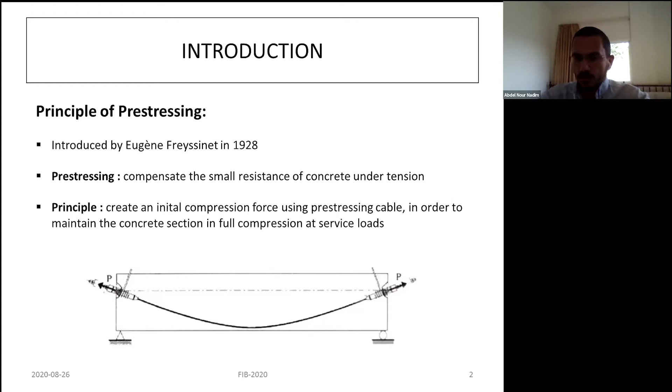It is used to compensate the small resistance of concrete under tension by creating an initial compression force using the prestressing cable. We have two types of prestressing: full prestressing, in which we maintain the concrete in a full compression state under extreme service loads; and partial prestressing, in which we are allowing tension stresses and limiting cracking in the concrete sections.

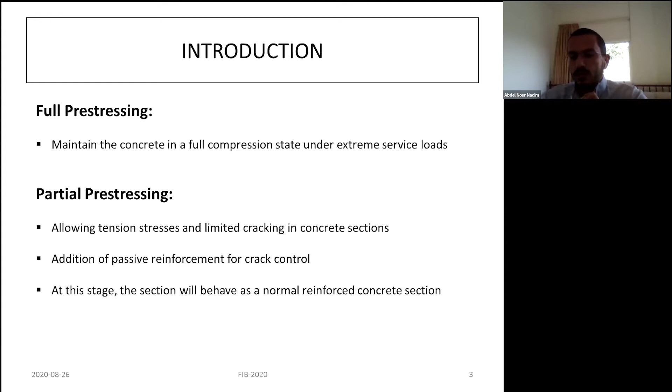The main objectives of this article are: one, develop a new approach for dimensioning of prestressed concrete sections. This new approach is applicable for both full and partial prestressing. It combines all service limit states and ultimate checks. It represents the permissible domain and formulates the formwork condition known in French code as la condition de coffrage.

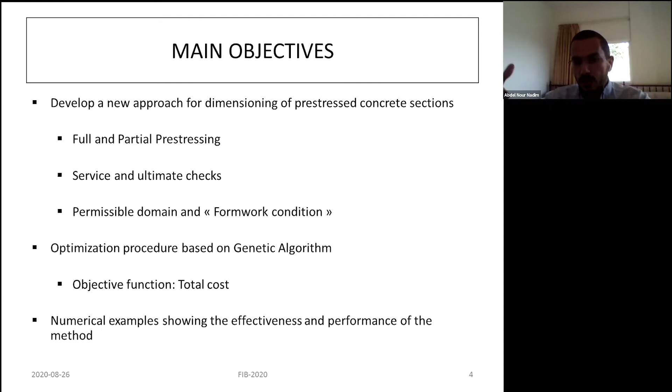In the second part, this new method is implemented in an optimization procedure based on a genetic algorithm with the total cost as an objective function. And at the end, the numerical examples showing the effectiveness and performance of this method will be presented.

Conventional design method. First of all, I would like to start by presenting what is usually done in conventional design method.

Usually, for each service limit state, we start by computing the values of P critical and P over critical, known in French code as la valeur de P sous critique et la valeur de P sur critique, based on stress limitation and cover conditions. And then the higher value of those two P's is considered for the design.

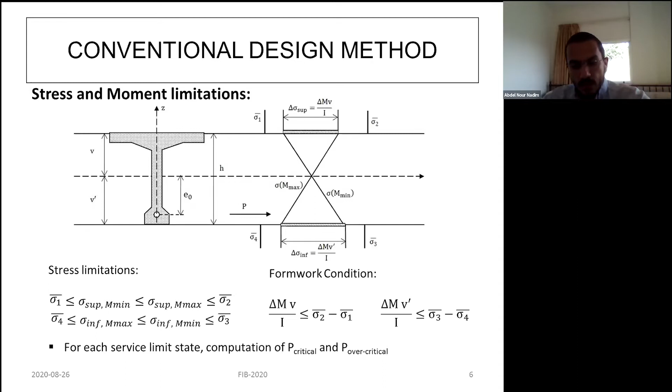As for the formwork condition, known comme la condition de coffrage, it results from the upper and lower stress constraints, based on which the minimum needed concrete section for serviceability checks is deduced.

Now the new pivot method we're presenting. In this method, the prestressing force P is considered as an exterior force acting on our section, and the crack width is replaced by a limitation on the stress in the passive reinforcement based on the provisions of the Eurocode.

And since we're dealing with T sections with heels, the width B of this section varies linearly along the height of the section. Therefore, the mechanical properties can be obtained by successive integration. We profited from this property for the analytical formulation of our new approach.

The main equations of this new approach are obtained from the basic equilibrium equations, which are the axial force and the bending moment, based on which a general polynomial function of the neutral axis position was obtained. This general polynomial equation f of x can be used for both full and partial prestressing.

With the only difference that when it is used in full prestressing, we have a fictitious position of the neutral axis since it will be located outside our section, whereas when it is used in partial prestressing, we have a real position of the neutral axis since it will be located inside our section.

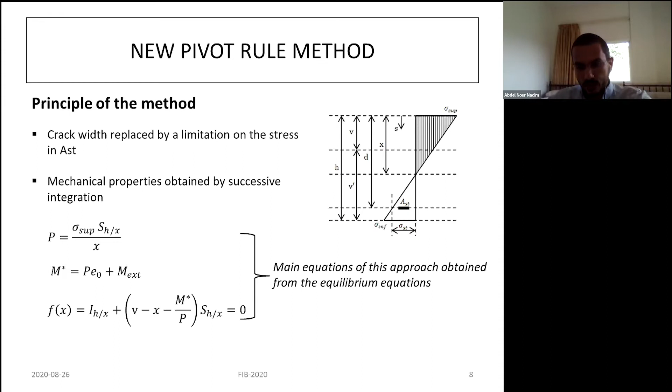Now, this new pivot rule applied for fully prestressed sections. First of all, we start by finding the neutral axis position by solving the main polynomial equation f of x equals 0. The well-known stress expressions on extreme fibers for full prestressed concrete sections are found.

The permissible domain is drawn by expressing the stress limitation in the plane P, M star. This domain is delimited by 4 lines that are parallel to each other 2 by 2, forming a parallelogram.

The following pivot rule representation shows the evolution of the stress diagram by moving along the contour of the permissible domain. For example, when we are moving along line D3, as if we are rotating around pivot 3, the stress sigma 3 is reached. When we reach the intersection of 2 consecutive lines of the contour, 2 stress limitations are reached simultaneously.

In addition, the known values of Pmin and Pmax can be obtained graphically and analytically. Finally, we can see the clear representation for the allowable limits of P inside the permissible domain.

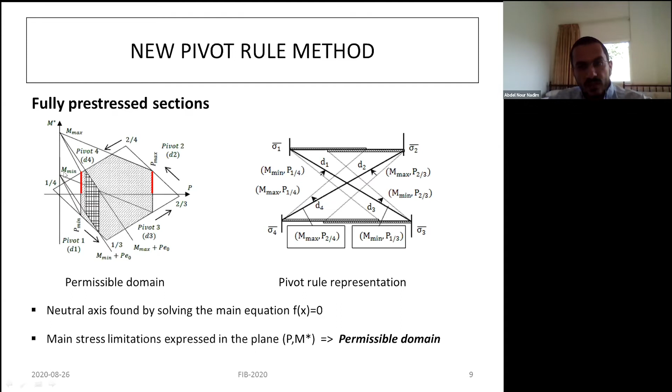Now, if this new pivot rule is applied in partially prestressed concrete sections, the same polynomial equation f of x can also be used to find the values of P critical and P over critical. The same pivot rules apply, with the only difference that the lower stress limitation sigma 4 will be replaced by a stress limitation on the passive reinforcement AST.

For the domain extension, we can see here clearly the domain extension. The extended parts of our domain consist of 2 curves that represent pivot 2b and pivot 4b. The intersection between pivot 2 and pivot 2b is clearly the limit between cracked and uncracked section.

We also have a significant gain in the value of Pmin, since the limit D4 of our permissible domain is replaced by pivot 4b, by the curve pivot 4b that is shifted further up.

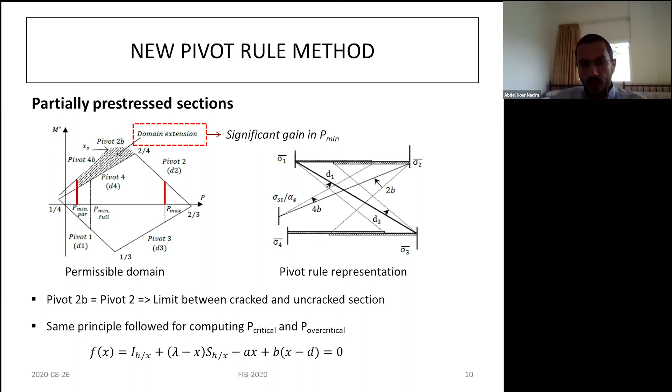Now, for the formwork condition, known as 'la condition de coffrage' in the French norms, this formwork condition is expressed or represented in the plane delta M-P for both full and partially prestressed sections. It is expressed independently from the values of P and E0.

This condition is considered verified if the difference between the maximum and minimum exterior applied moments is less than the maximum delta M value. We can clearly see here the extension of the formwork condition due to the partial prestressing. In addition, we have again the formwork condition verified for values of V over V prime less than 1.

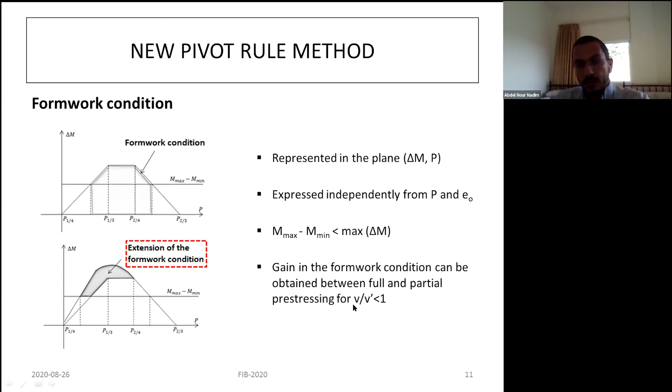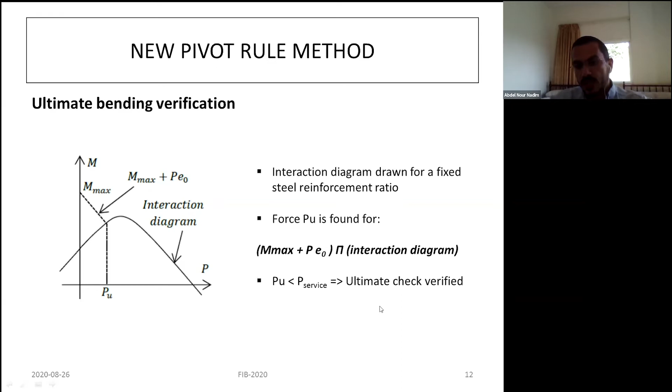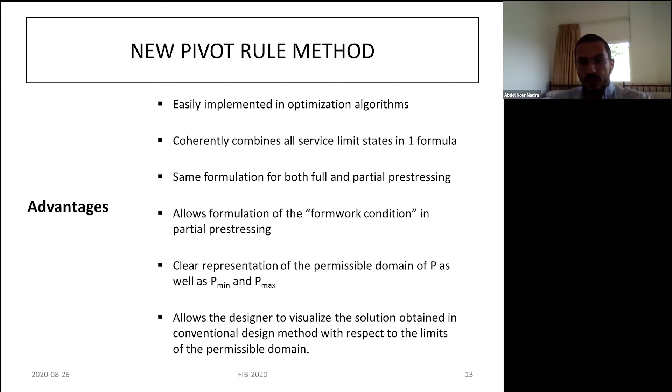We have a clear representation of the permissible domain with the range of permissible values between Pmin and Pmax, and good importance should be accorded to Pmax, since it might control the design in some of the serviceability cases, in some of the service combinations. Finally, it allowed the designer to visualize the solution obtained in conventional design methods with respect to the limits of the permissible domain. Now we move to the optimization part.

An optimization procedure was implemented based on genetic algorithm with a penalized cost objective function with geometrical and flexural constraints. The design variables are the geometrical dimensions of the sections, the percentage of passive reinforcement, and the tendon configuration.

When it comes to the optimization methodology, since we are using a genetic algorithm, the following was followed: first of all, an initial population was generated randomly. For each individual, meaning for each couple V-H generated in this population, the optimal dimensions of the heels were found based on the computed P value.

This was based on the tendon configurations that were introduced automatically in our Scilab program. This calculation is repeated for each individual of the first population. At the end of the first iteration...

All the objective functions are evaluated and the genetic operators are used in order to generate a second population and move to the second iteration. This iteration process shall continue until reaching the stop criteria and the optimal solution is obtained.

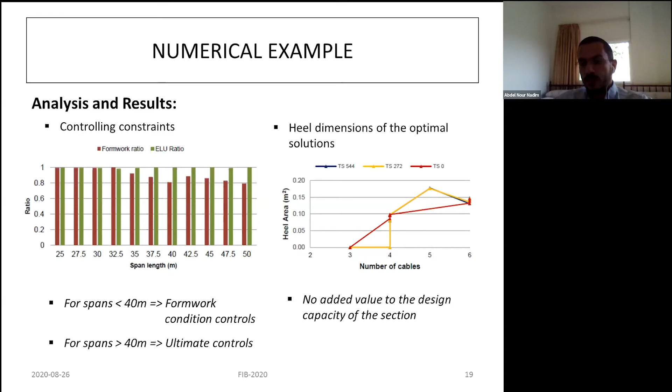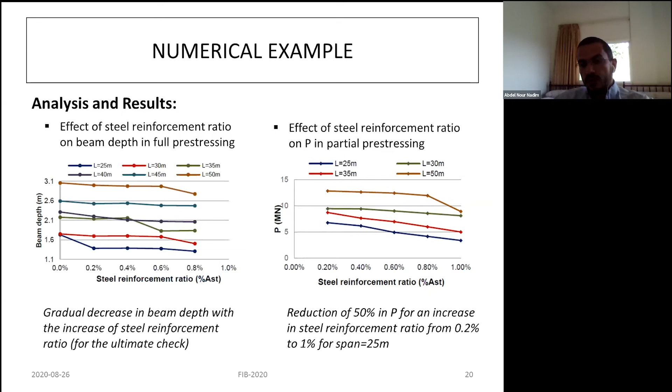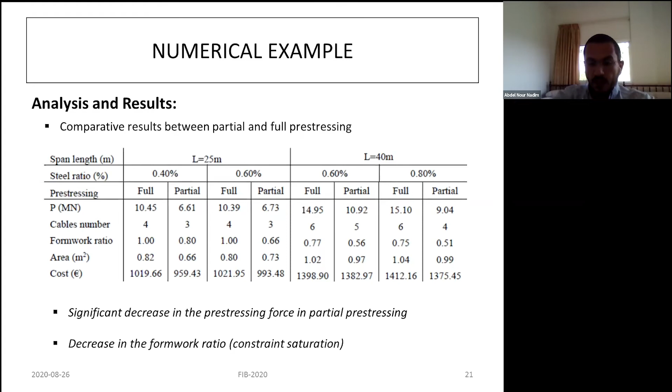And finally, a sensitivity cost analysis was performed, a sensitivity for the cost of the concrete and the active reinforcement was performed. It was clear that the optimum solution is directly affected by the unit cost.

And finally, we can say that this optimization procedure, or the objective function related to this optimization procedure, can be easily modified based on the designer's objective. This means that if the designer chooses to minimize, for example, the prestressing forces, the concrete section, the passive reinforcement, this can be done easily. The objective function can be modified easily as opposed to conventional methods for dimensioning.

That's it. Thank you very much for your attention.

Thank you very much. That was a very, very clear presentation. I understood it, I think, most of it. Thank you.

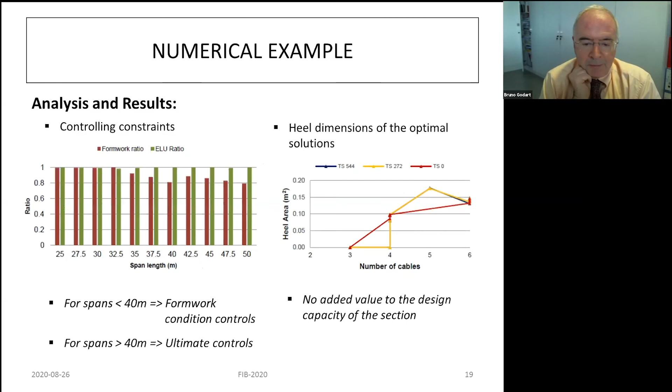Bruno Godart: Yes, I have two questions, maybe. If you show the slide 17... in your optimization with the genetic algorithm, it seems that the ratio of steel reinforcement bars has not been considered as a design variable. Can you explain why?

No, actually, I tried to program my algorithm in a similar way to what designers do in practical life, which means for a certain specific percentage of steel reinforcement, I am running a certain optimization calculation. This means that my calculations will be repeated for several percentages of steel reinforcement. This means that for each percentage of reinforcement, I ensured that the needed rebars had enough place to be placed inside the heel of my section. But the steel reinforcement was not a design variable. It was something that was specified at the beginning of each iteration.

Okay, but it could be considered also as a variable. Yes. I didn't say no. Yes.

Okay, and my second question is about the fatigue limit state. I am talking about the fatigue of steel reinforcement and fatigue of steel prestressing. Have you an idea how to take into account these rules on fatigue in your procedure?

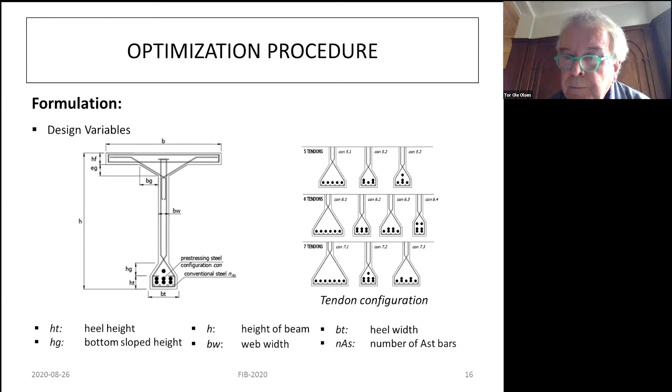I have one question. After reading your paper, I got the impression that this tool of yours is also thought to be used for conceptual design. Yes. Okay. And as such, it's very valuable.

And if you take up your page 22 from your presentation.

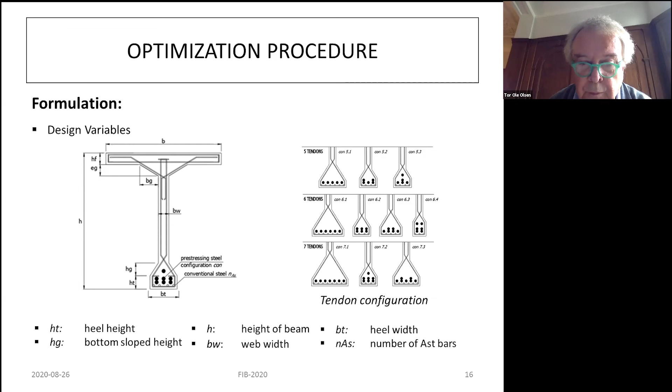So my question is, at the bottom there, you mention the objective function is easily modified. Let's say you're not optimizing on the cost of the beam itself, but something else - for example, if you have limited crane facilities. Could you then just put that into your model and optimize on that?

Yes, actually, if I had a limited crane facility, my concern would be to limit the weight of my beam, if I got you right. If this is the objective, I can easily modify my objective function - it will become the area or total section of my beam. Once my objective function is modified, I can modify my algorithm, so I will be minimizing the weight of my beam.

This means I might need to add extra rebars, extra cables, extra active reinforcement, but in this specific model my purpose is to minimize the weight of my section. That's good, because you end up with a slightly more expensive beam, but maybe a less expensive crane, for example. Exactly, this is the point.

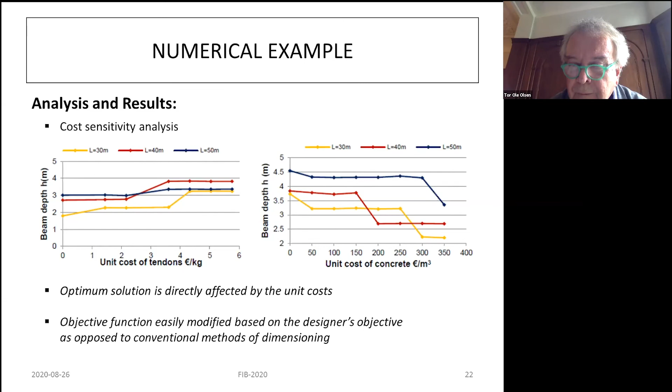Can I just follow up on that? What do you think is the best use for this? Do you see it being useful at a conceptual design stage, or is it more useful for optimizing at a later design stage when you've closed out most of your design decisions?

Actually, I can say it can be used in both cases. Using it at early stages is efficient since we will have an idea of the section we might obtain in the final design, and since the analytical procedure is not formulated in a complicated way, it can be used even at early stages. We don't have complicated calculations that we need to leave for advanced stages of the project, so it can easily be used both at early stages and at final design stages.

Okay, and how long does the optimization take to run? Actually, it's a question of one or two minutes on Scilab - if you know Scilab, it's similar to MATLAB. One or two minutes, not more.

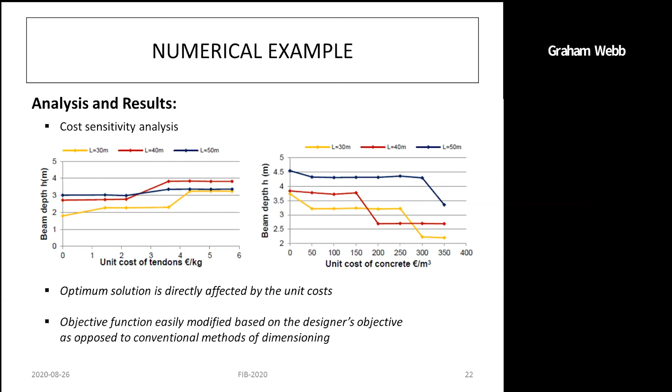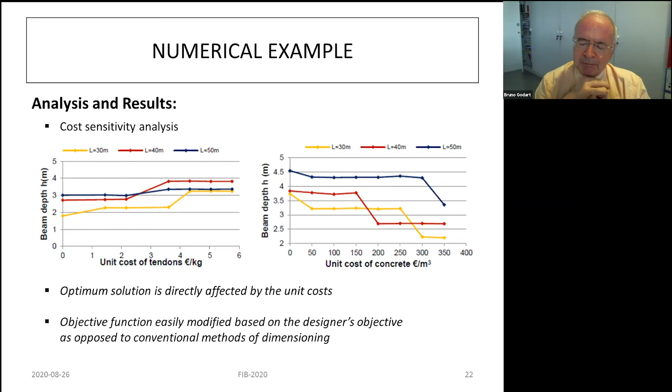I have another question: in which order do you manage the checking of ultimate limit state and service limit state? Actually, if we go to the conventional design method, we start by checking our section at service limit states, then we verify our section for ultimate checks. This is what is usually done. Our optimization procedure is a bit similar to what is usually done in the conventional procedure.

We start by finding the value of the prestressing force that is needed. After that, we choose the heel dimension based on specific tendon configurations introduced in table form in our algorithm. Then we perform the ultimate check verification. But it turned out that in all optimal solutions, the ultimate check verification is controlling the design. This doesn't mean we are performing the ultimate check before the service check - we're following the same steps.

At the first step, we're doing the serviceability checks and finding the force P. Then we're performing the ultimate checks. But it turned out that the ultimate checks are controlling the design, even though they are not performed before the service checks.

And your optimization is working on both aspects? Yes, for sure. Actually, what we did is create what I called a ratio - we have a ratio for the values of P, a ratio for the formwork condition, a ratio for the ultimate verification, a ratio for the shear verification. A ratio that has a value of 1 means the constraint is saturated and controlling the design. So all those verifications and checks are included in the design.

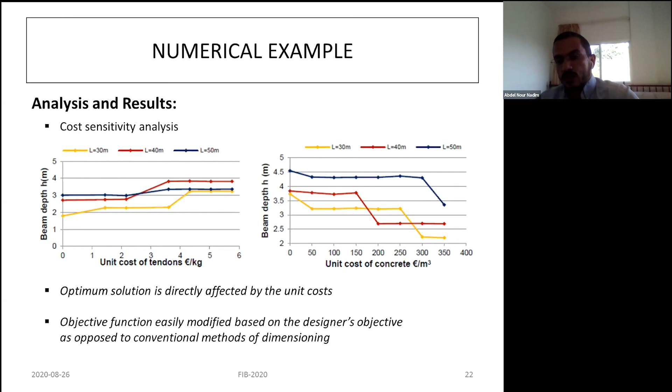Going back in the presentation, in this table, when I mentioned the flexural constraint here in this slide, it includes the minimum prestressing force, the maximum prestressing force, the formwork condition, the ultimate bending check, and the shear verification. All those constraints are taken into consideration in our optimization algorithm, in addition to the geometrical constraints.

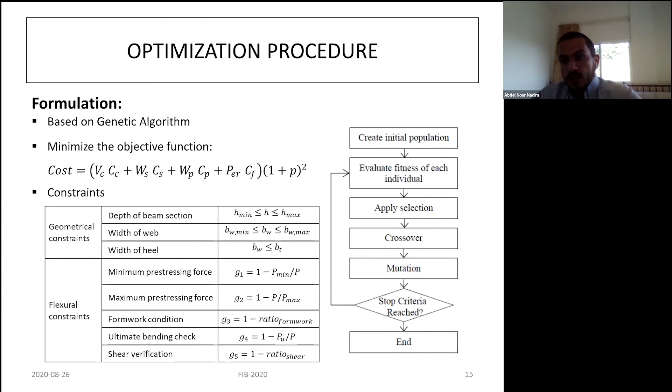And for the shear verification, is it at ultimate limit state? Actually, for the shear verification, as per the provisions of Eurocode, it is permitted to use Annex QQ. In this annex... You use Annex QQ. Yes, exactly. Okay, thank you.

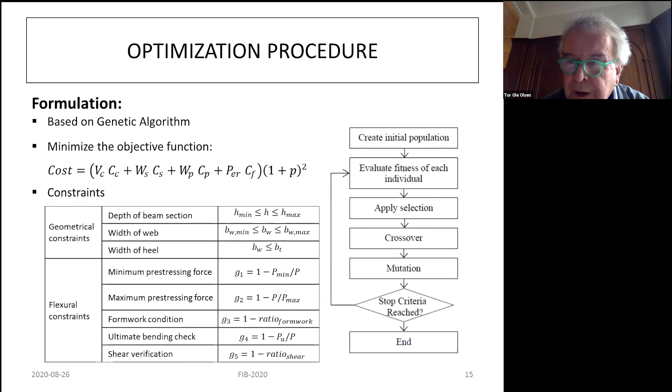Thank you very much, that was a nice presentation. Thank you. Thank you.